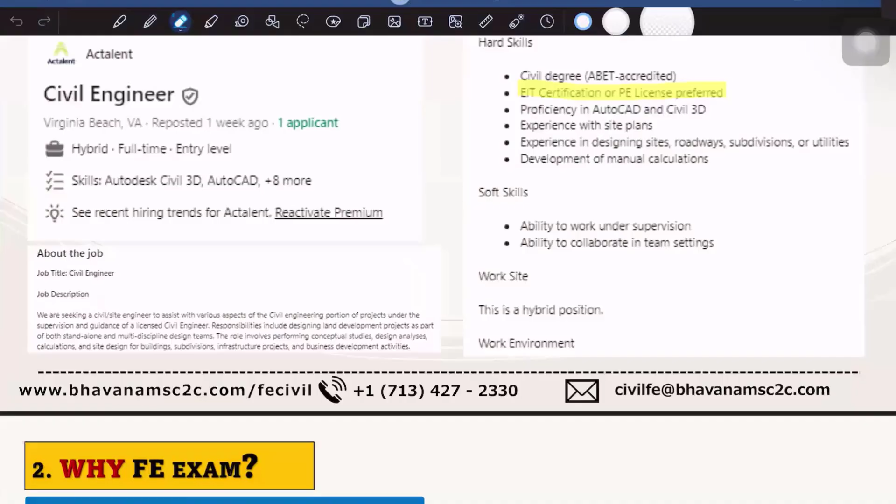Yeah, so we have this. So you guys tell me, is this FE exam open book test? Saida, you're responding, that's great, some of you did not attend the exam. I hope you guys know something about FE exam. Can you guys tell me what you know about it? Like, it's an open book, you can get the soft copy for the reference handbook. That's it, yes, and you can bring the calculator with you.

So it's an open book, and the open book is the soft copy, and you're allowed a calculator. Is it a scientific calculator or something else? Yes, scientific calculator, basically. And coming to the fact, it is an open book test. So is it 100% open book test, or does it vary with the exam and the date of schedule? No, the fact is it's not 100%. It's around 70 to 80% open book test.

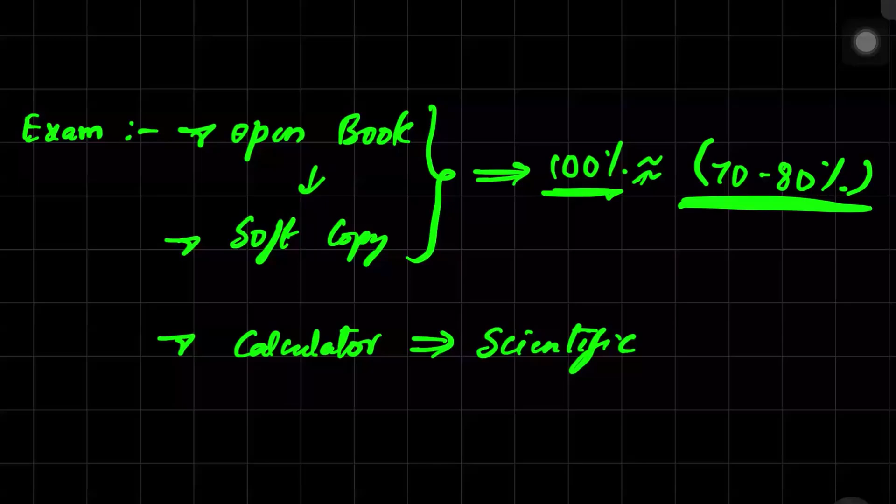There can be some questions, there were some questions which were out of the handbook, but they are from the syllabus. The handbook has officially mentioned what is there in the syllabus.

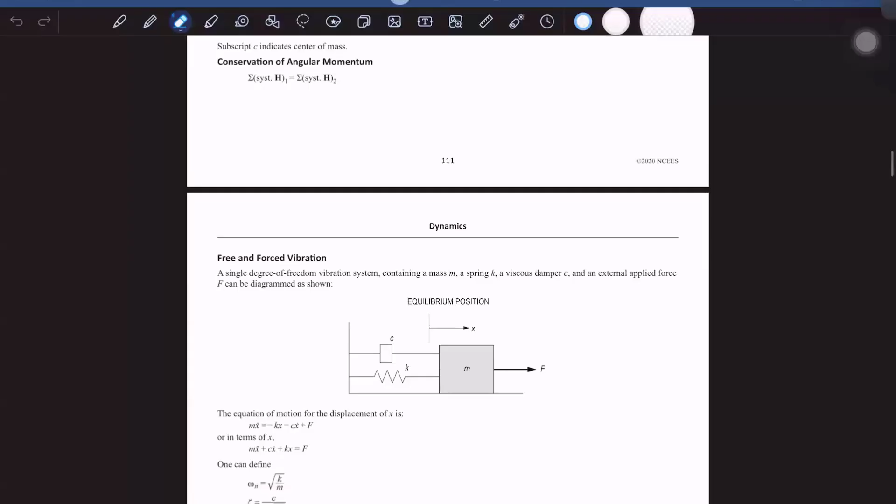So if you guys see, I just shared the syllabus right now. This is the syllabus that you can see from the handbook, section 10.5. I just extracted these pages out of it. For the civil case, there are plenty of subjects. How many subjects do we have? I guess 11. And 14? Yes, we have around 14 subjects. And total marks? 110, yeah perfect, so we have 110 marks for that.

And out of these 14 subjects, you can see all 14 are mentioned here, like geotechnical engineering, transportation, structural engineering, water resources, and so on. So you can go through them.

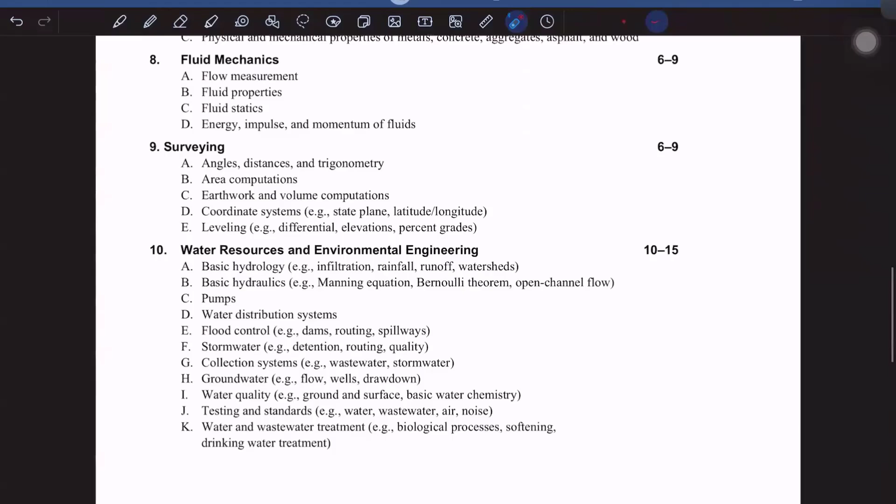And the fact is that there are subjects in the handbook. Like you can see the fluid mechanics, I'll show you an example of how fluid mechanics works. Here it is, the syllabus for fluid mechanics for civil engineers: flow measurement, fluid properties, fluid statics, energy, impulse, and momentum. These are the basic things that must be known for civil engineers, and that's why the syllabus is very limited for the case of civil engineering.

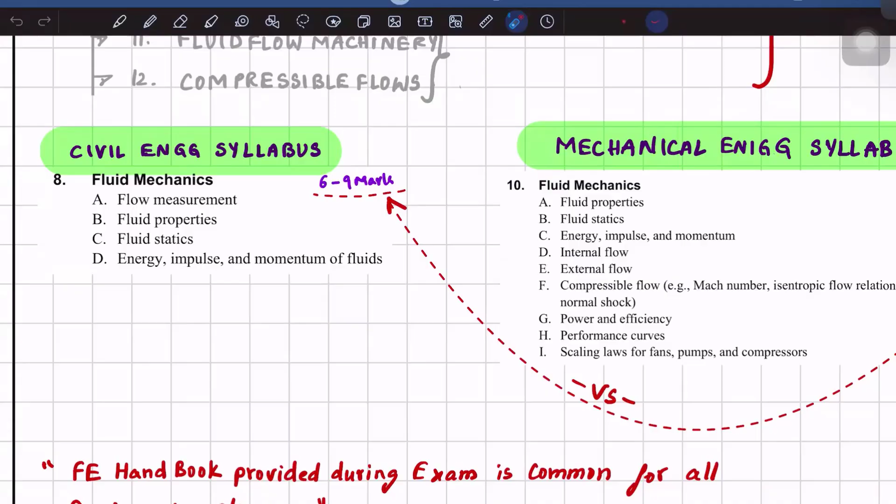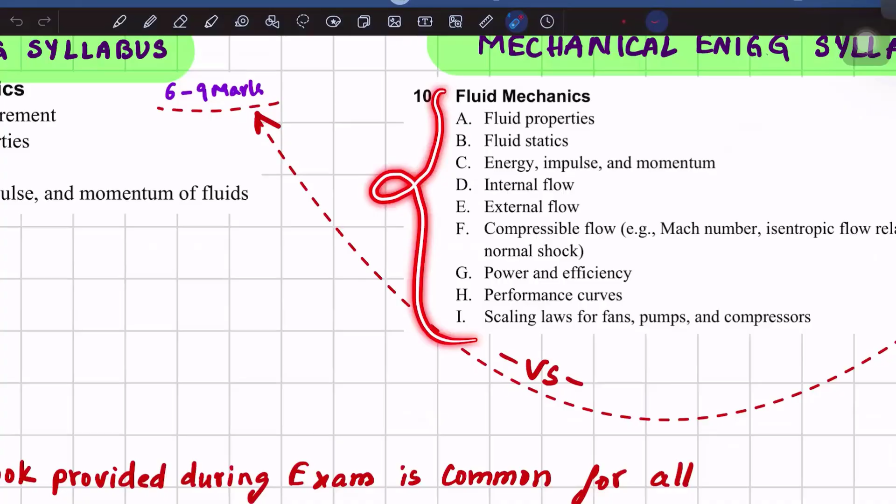And when you see mechanical engineering in the same handbook, the syllabus is a bit vast. So can you guys answer my question, just a doubt: is the handbook that is open to you the same for all streams like civil, chemical, mechanical, or will it be different? Same, it's the same, no. The PDF that will be open will be the same for all streams. Yes, it will be the same.

It is the same, and when you open the fluid mechanics handbook, suppose this is the PDF which you see during the exam, and when you go for the handbook there, sorry, fluid mechanics.

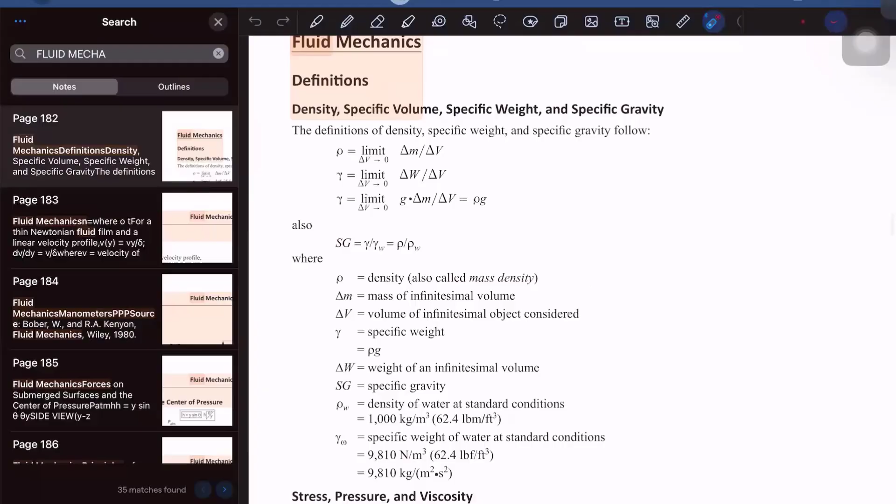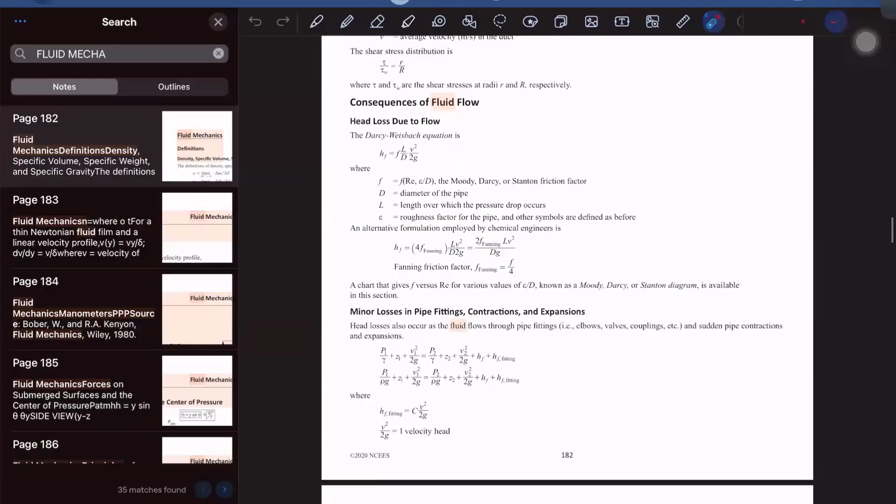So we can key these, we call them keywords, which means to go to a particular topic very easily, you can just search the topic and you will get there. So in fluid mechanics, there are plenty of things like manometer, barometer, fluid pressure, and then going further, Reynolds number, fluid flow characterization, and types of flows like turbulent, laminar, transitional flows, etc.

Out of all the pages available for fluid mechanics, suppose there are 25 pages. These 25 pages are meant for all the streams together, not exclusively for civil engineering. So we need not blindly just follow the entire handbook. We must go with a priority basis.

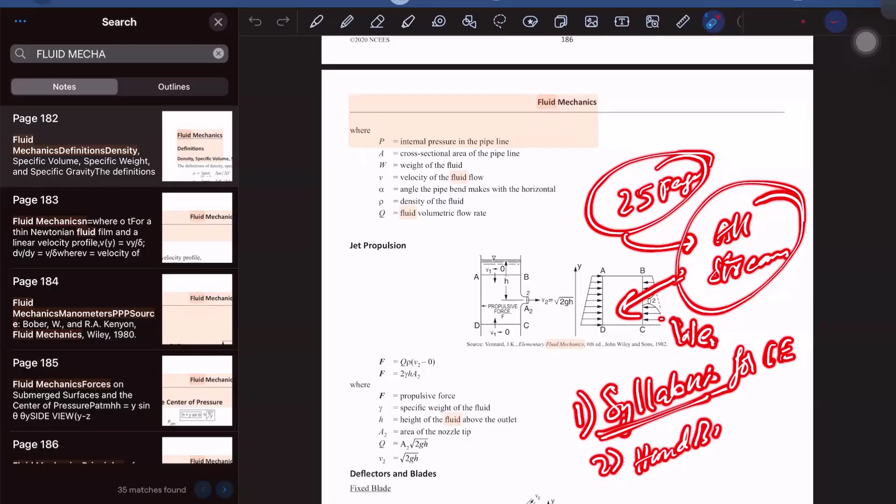The first priority is the syllabus. You first see what is the syllabus exclusively for civil engineers, and then go for the handbook. So if you see our notes, these are our efforts, we have split the syllabus like this, whatever content is there.

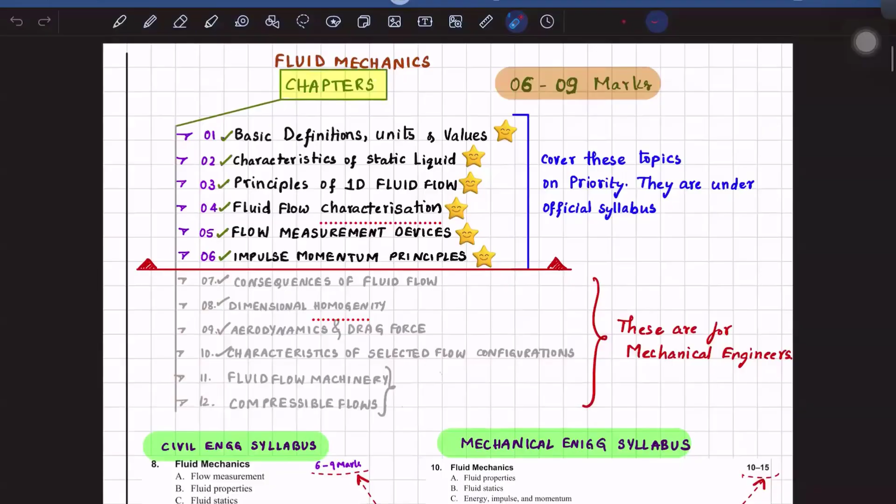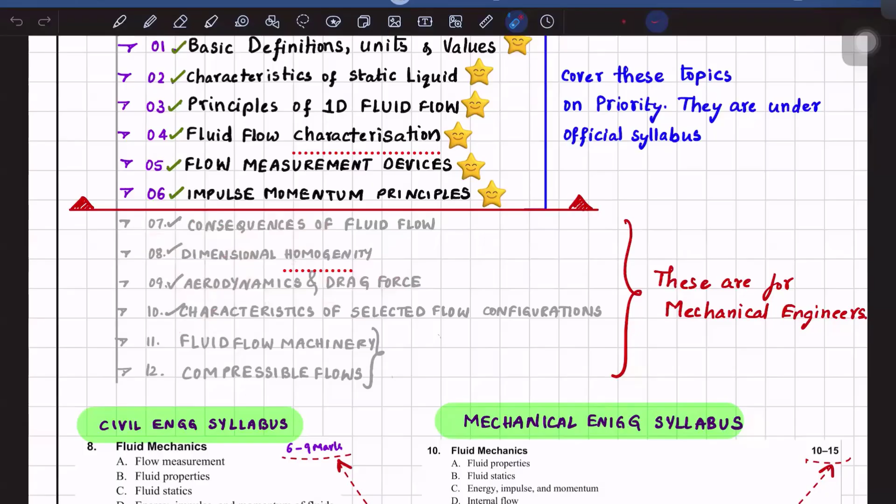In the handbook, there are around 12 topics for fluid mechanics. Out of that, we have separated the topics needed only for civil engineering, and nullified the topics for mechanical engineers. So doesn't this help you easily wipe out things in the handbook, reducing its length so your brain feels easier to prepare and recall the subjects?

And yes, everything is there. I have explained whatever I said, that the FE handbook provided during the exam is common for all. Fluid mechanics in the handbook is for both civil and mechanical. We civil engineers only need limited topics, and even in the standard books they have limited topics.

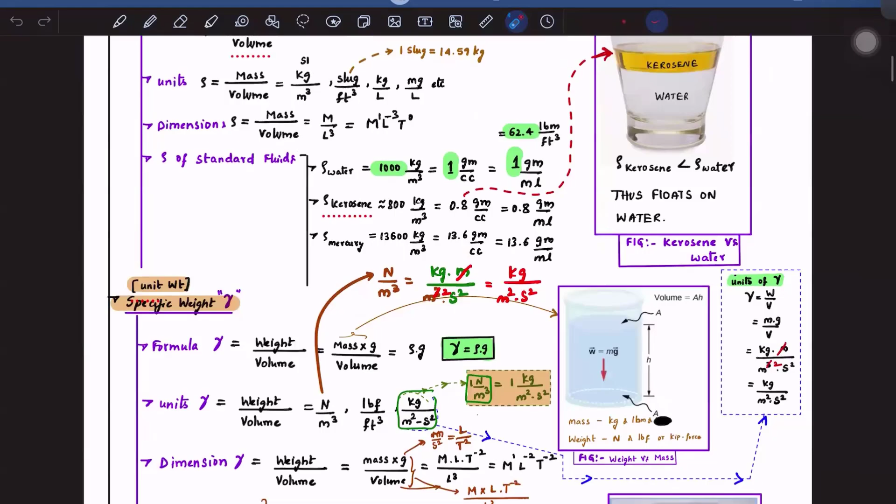So this kind of suggestion, and if you see our notes, we have done a lot of work for units conversion, as Madam Saida asked. There are plenty of examples here, and you can see some memory tips, danger tips, where we can make mistakes at the time of exam.

If you get a question related to units, there can be options like acceleration due to gravity - they can give meter per second square, and another option meter square per second. So we may get confused in a hurry, or with overconfidence put the wrong unit for acceleration, since there are two things in the entire syllabus which look alike.

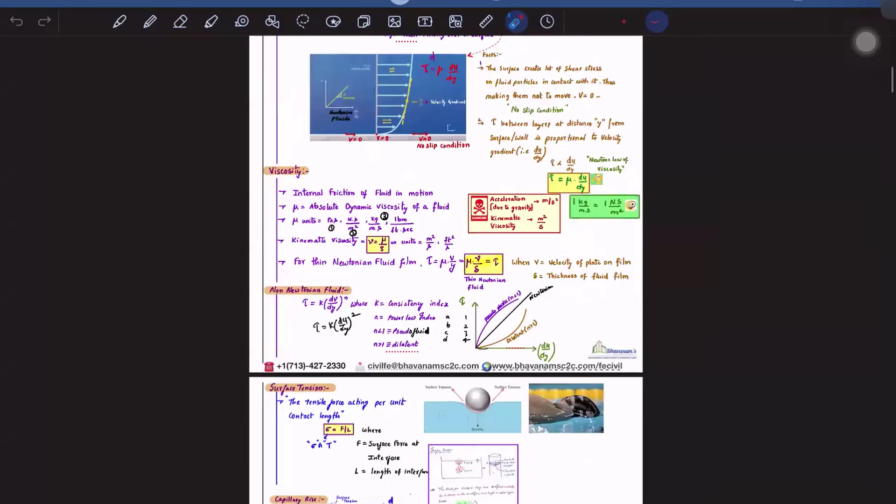So we have piled up all these things. You can see the efforts we have done - not only regarding the marks to obtain in the FE exam, we have correlated the content with actual applications.

Suppose this is an example for capillarity - why water is transferred from the roots to the leaves without use of any electricity or pump. This is all because of capillarity. You can see why a towel gets wet, water comes up, or the kerosene lamp, etc.

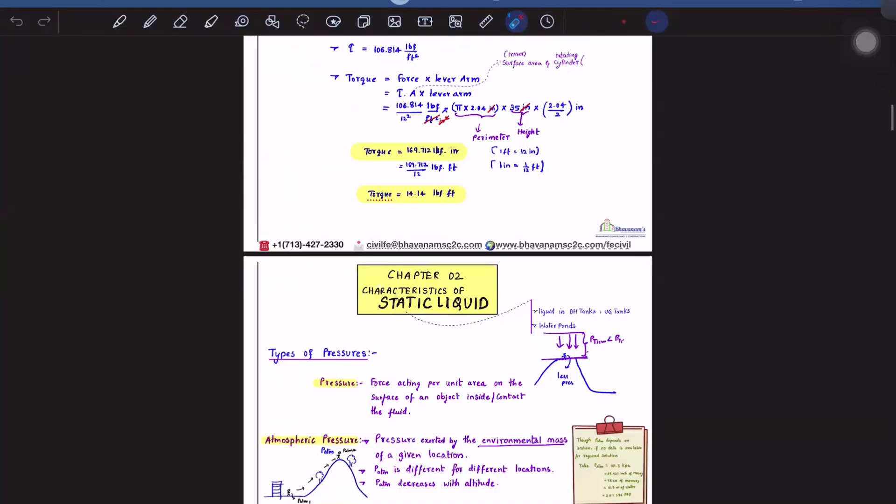So you need not worry about the content we teach, and we can proudly say we are doing the best among all the top institutes available in the market.

You can see, always recall the expected range of answers. We can get an answer conventionally for any subject. There are two ways of getting the answer - the first way is conventional. Go straight to the formula in the handbook, or go back to memory and pick up the formula, feed the data, and you'll get the answer.

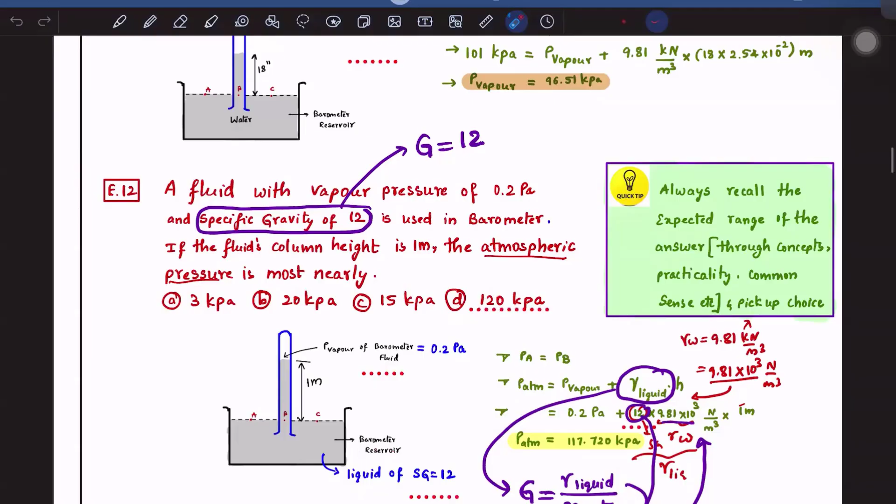The second thing, which is the most followed in competitive exams, is eliminating the options. To eliminate options, we have many tips - choose the sign, whether it is minus or plus, or choose a range of answer, whether my answer lies between 3 to 4 or 300 to 400. There are some possible ways to pick the practical range of answers.

And the third way is through possible units. If they ask specific gravity, specific gravity doesn't have any units, so you can pick the option which has no units. Such quick ways of answering questions will guide you in that way too.

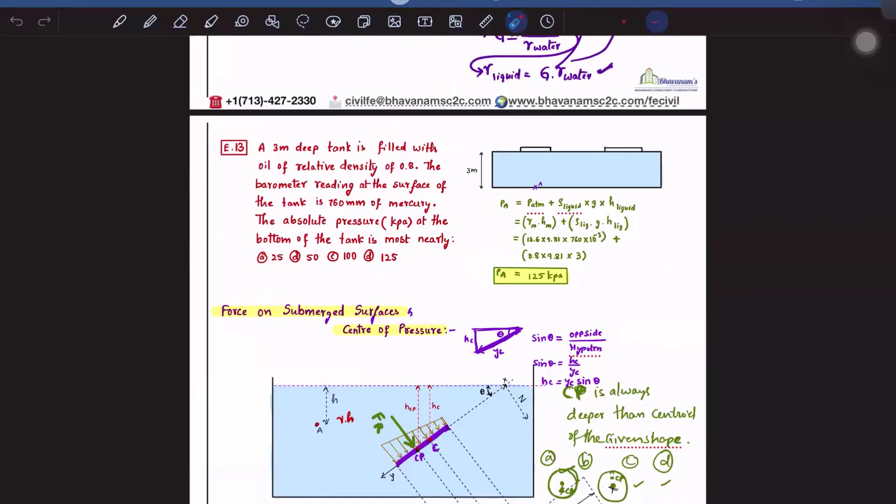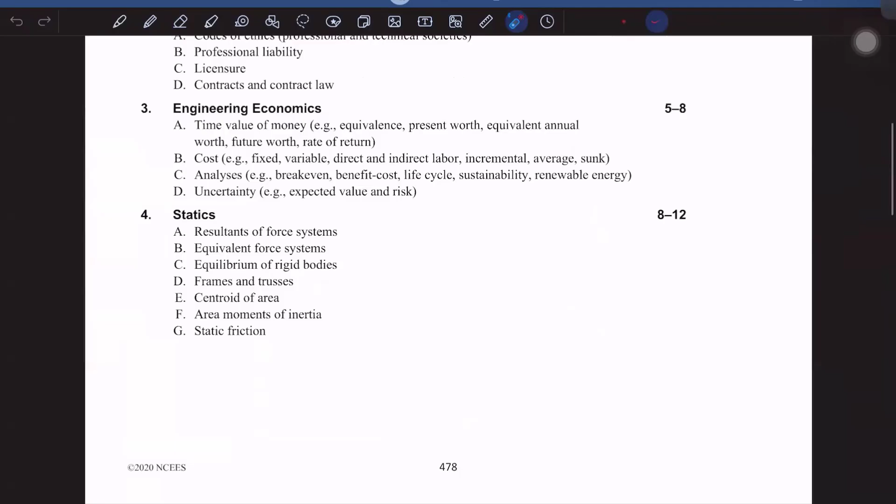So that's the thing. Coming back to the syllabus, I'm recalling for batch 6 guys the subjects I will be taking - number 1 is statics, then dynamics, materials, mechanics of materials, then structural engineering, and then I'll go for fluid mechanics. So where is fluid mechanics here?

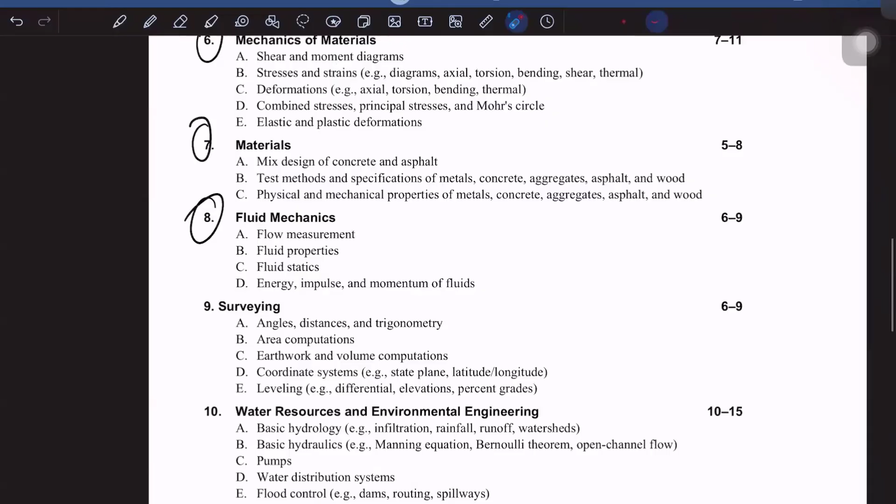Yep, here. So for batch 6, that is the new batch, I'm about to start the subject materials, which will help you get into the civil engineering field, if you are away from the theoretical knowledge, whether you might be working in some other field or even in the civil engineering field.

So I'll start the subject with materials, which will be a good transition for you to catch up on other subjects. Coming to materials, this carries about 5 to 8 marks of weightage, so out of this you can expect on average 6 marks.

So coming to the 6 marks, we have the mix design of concrete and asphalt, and the test methods and specifications of metals, concrete, aggregates, asphalt, and wood. They have basically emphasized these five areas. So this is all about the syllabus.

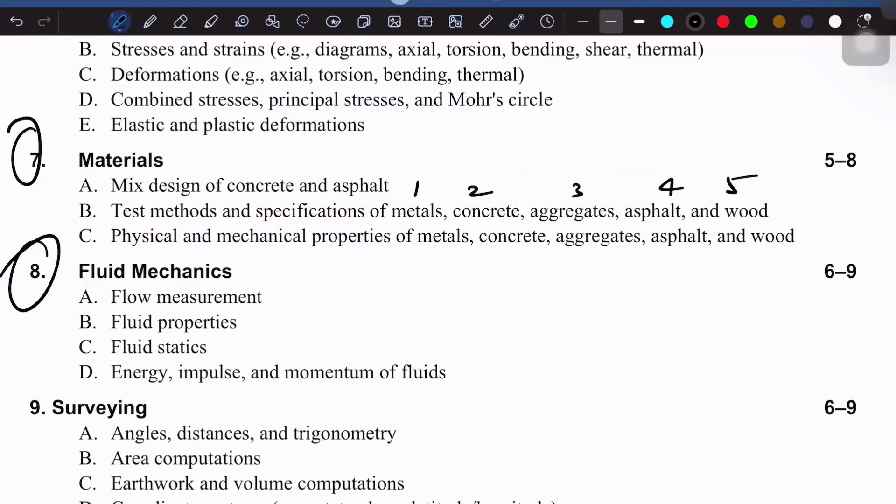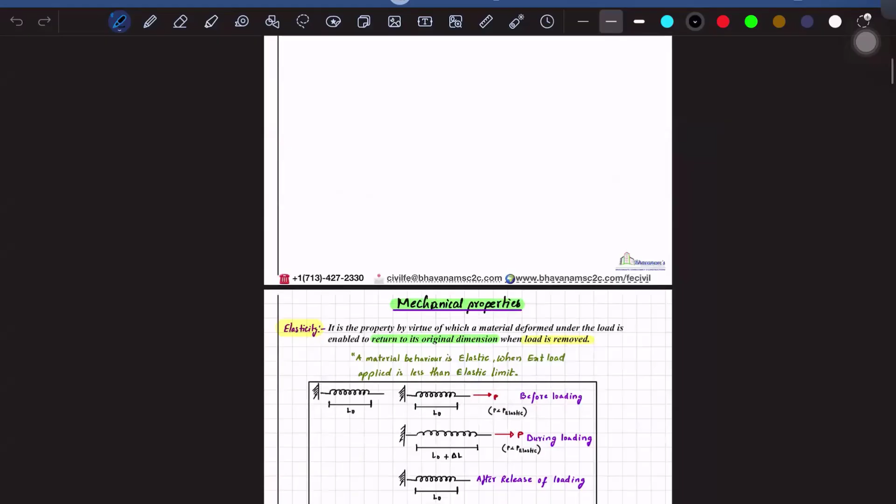Now coming to this topic of materials, tell me, what are the different materials you see in day-to-day life in civil engineering? Name them. Asphalt, concrete, wood, cement, steel, soil, aggregate, timber.

Yes please, what do you say? Admixtures. Perfect, admixtures. And soil, is it soil or do you mean something else? A kind of soil. What soil is it? Someone said a pretty good thing, admixtures, and someone said soil.

Glass is also a construction material. And stone, aluminium. UPVCs, perfect, there are UPVC windows. And sanitaries, sanitary wares, they are not exactly construction material, they are made of something else. PVC? Sanitary ware may be made of some China clay. There are different materials used.

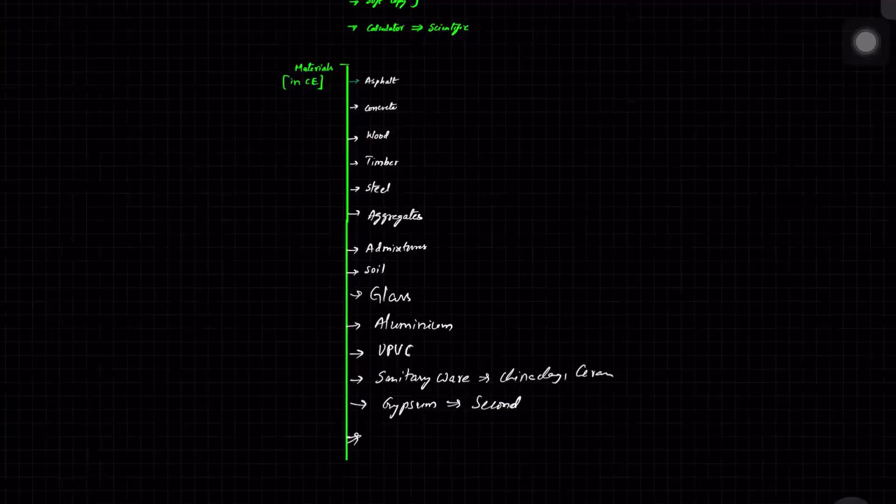Ceramics, gypsum, yes gypsum is also a construction material. Actually gypsum is a secondary material offered to cover the joints between primary materials like aluminum panels, and so on. We can even do gypsum false ceiling. Yeah, gypsum is a material, yes. Like this, bricks, perfect, that's a pretty basic answer we are expecting.

Drywalls, cardboards, stone, yeah stones, very good, stones are also construction materials. May not be known to them. So where were stones used in your day-to-day life? In the form of aggregates. Yeah, stones can be converted to aggregates. I agree, this is right.

So asphalt, yeah, stones after converting into aggregates are used in asphalt. That's fine, but can't we use stones directly as it is? You can use the stones in earth soil fill for soil support. So which indirectly you are saying, stones used for embankments. Embankments, yes, you're almost near. So which we call them as random rubble masonry.

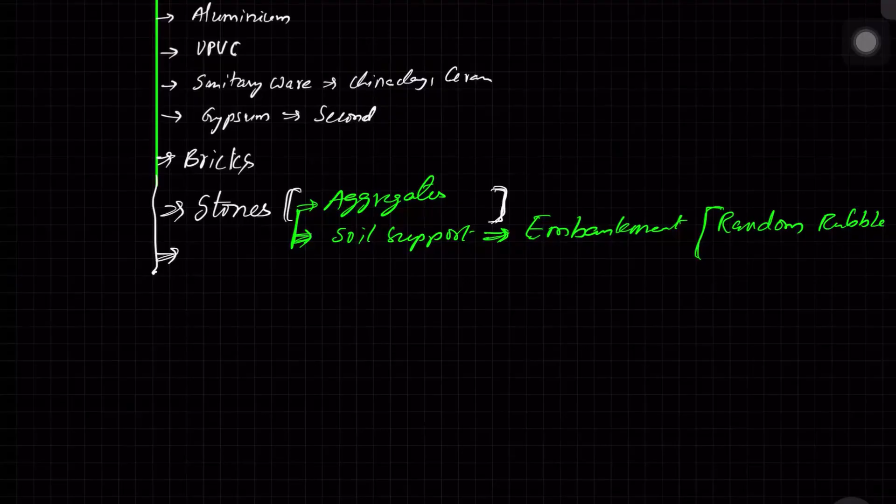The rubbles are nothing but stone. If you do some masonry work with stone, we call them random rubble masonry. It serves different purposes: they can be used as boundary walls for separation, or for retaining the soil as a supporting structure, etc. Did we miss any other important material? Just think of it: asphalt, concrete, wood, timber, steel, and so on.

So coming to the most important thing, what is asphalt? Where do we use asphalt? Roads, yes, they are used in roads. Coming to concrete, it's used almost everywhere, right? Yes, it is used for buildings, for any kind of RCC works, PCC works.

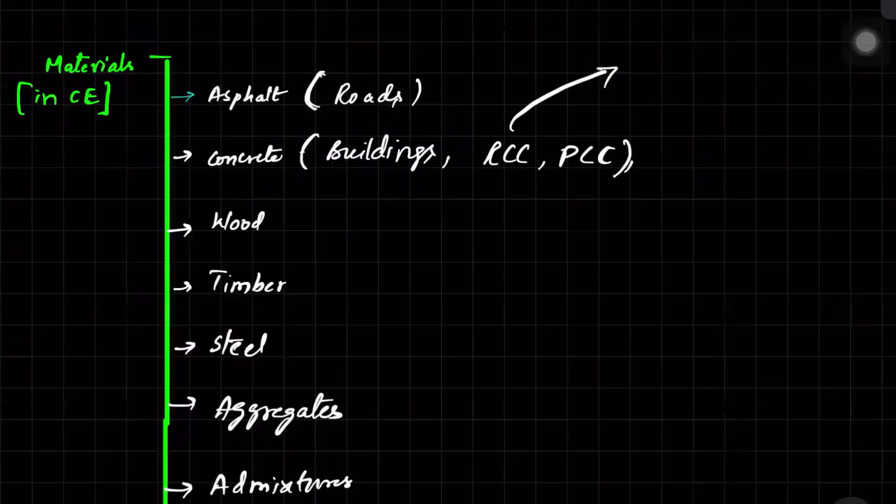What is RCC? Reinforced cement concrete. Okay good, and what is PCC? Precast, Portland, precast cement concrete. Plain cement concrete, yes. Someone said precast, yeah that is also a kind of concrete we use with the help of steel under compression.

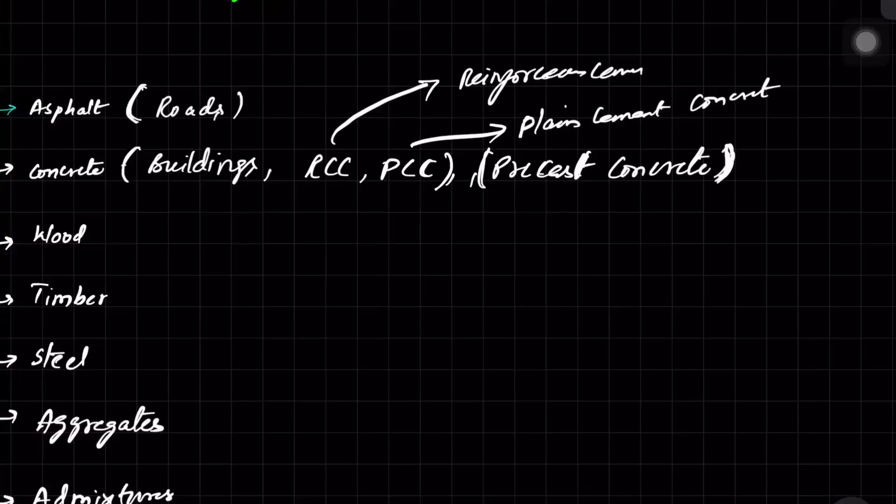Am I right? In precast concrete, this session is a general session, I will try to just recall all the things which we know till now. So what do we do, why do we do precasting in concrete? While construction of bridges, it improves the strength of the cement. Improves the strength, that's the main purpose. Pretty good. So how does precast improve the strength?

By applying pressure. Yeah, by applying pressure, pretty right answer. So the madam said right. So we know there are some beams, simply supported beams or any kind of beams, when we apply some load, and you guys know we'll use the tension bar here.

Am I right? Should I use tension at the top or bottom? In the bottom, for RCC. Yeah, so anyone else, is it right? In a simply supported beam, when the load is applied, one of our friends said the tensile bar must be at the bottom. Why should it be at the bottom?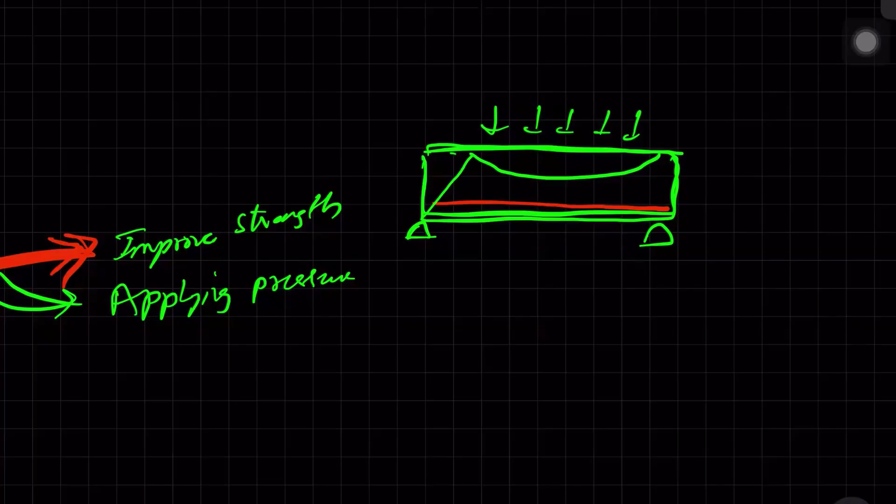Because it expands down and almost compresses near the top. Yes, perfect, you are right. So when we apply some load, the deformation shape will be kind of like this, something like this.

We call this profile as sagging. Because of that, the top fibers will be under compression, and because of bending, this member has elongated to some extent, so this will be under tension. Because of that, we have given steel.

Why? Because the concrete has some weakness. What is that weakness of concrete? Weak in tension. Yes, perfect. Concrete is weak in tension.

That's why in RCC we take the help of our friend, the reinforcement steel. So we place him where we want him. We want him at the location where we have the weakness. We have the weakness at the tension side. That's why we placed the reinforcement steel at the bottom.

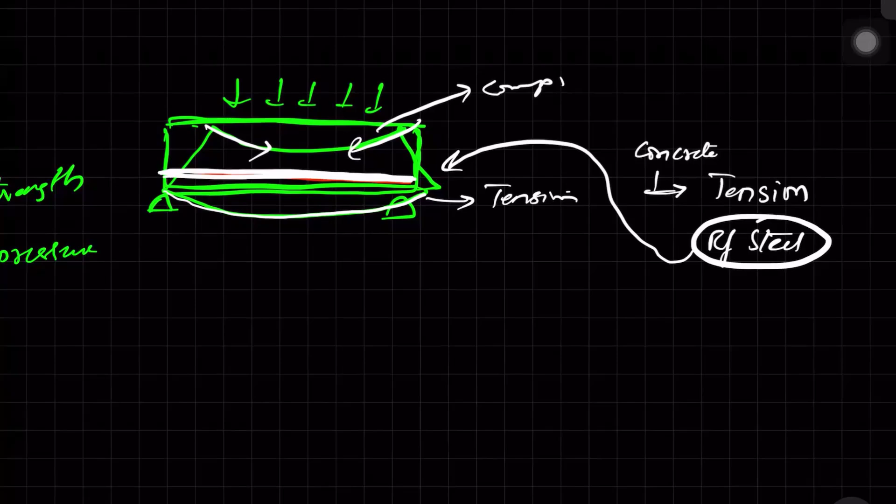Now if the loads increase further and further, even our friend reinforcement steel can't help to take the load. Then what we do is give some strength to the reinforcement, like Iron Man wearing his suit, to give some extra support to this guy.

So what we do is try to pull this guy now. Since steel has some elasticity, we'll try to pull him, assume the steel as a kind of rubber, pull him and tie him at the ends. Now this rubber band, or the steel to some extent acting as a rubber band, will try to regain its position.

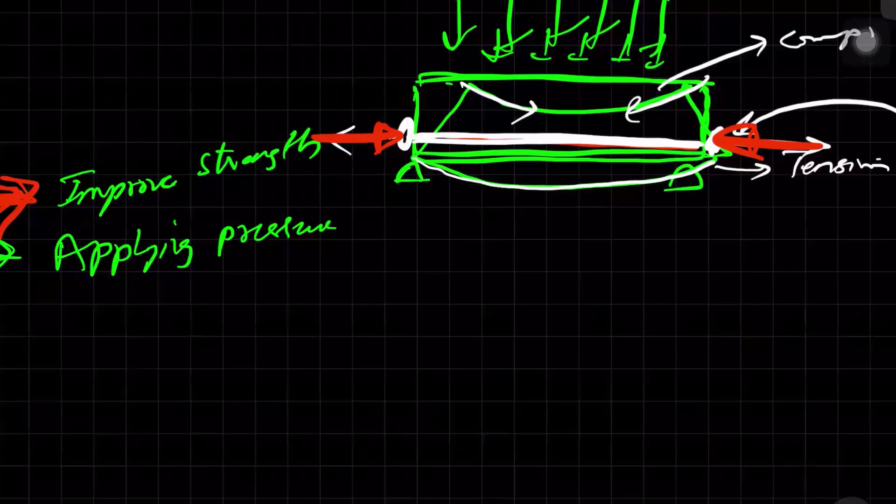With that effect, it will try to compress this here. So when you try to compress, the tension will be nullified with some compressive force, which is developed due to the elasticity of the steel. So this is all about precast. I just recalled it, and yeah, someone said cement also, right?

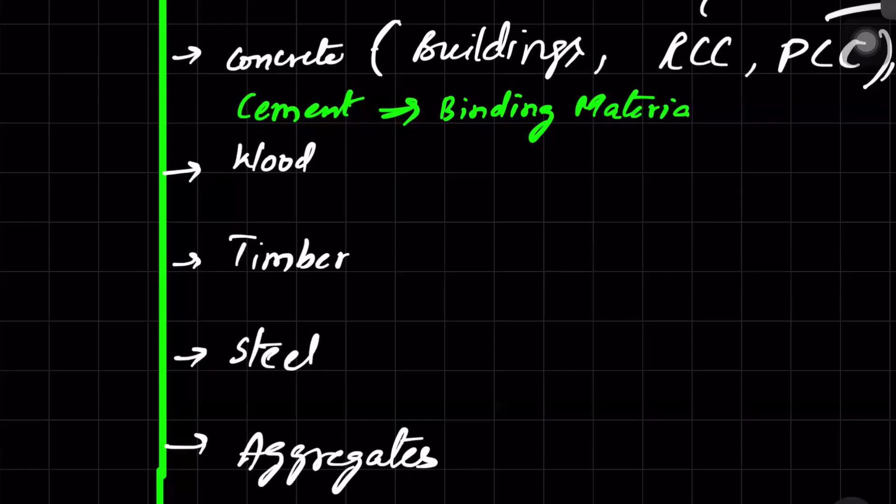So what is cement and how is it different from concrete? Cement is a binding material in the concrete. Wow, that's a pretty right answer. Perfect answer. Cement is the binding material used in concrete.

So is it only used in concrete as a binding material? We use cement in some other places. Can you guess? Mortars. Perfect. Mortar. Other than the madam who answered right now.

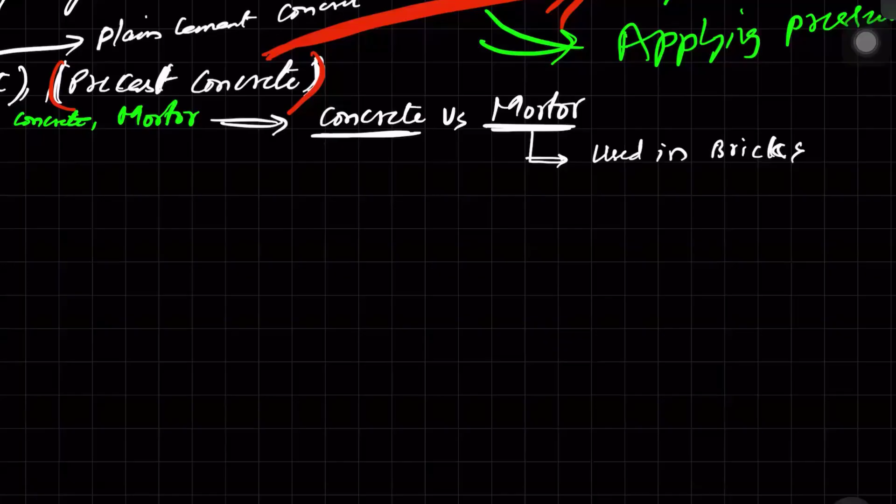So what is the difference between concrete and mortar? You guys might have heard it in day-to-day life. Mortar is more like a binding agent between the concrete or the bricks, for holding the structures together. The answer is right. Mortar is used in bricks as a jointing material between layers of bricks. But we cannot use concrete in bricks.

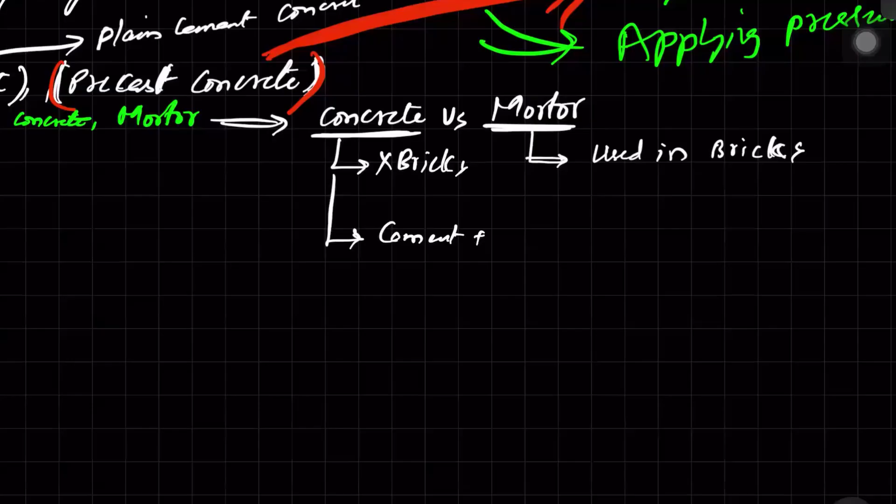So you can see concrete is made of cement plus aggregates, sand, water, and sometimes admixtures. Madam said sand, but I did not consider writing it here separately, because that is already included in aggregate.

Aggregates are again of two types, can you guys name it? Basically two types, fine and coarse aggregate. So out of this, one is called sand. Which one is sand? Fine aggregate. Fine aggregate is sand. Pretty good, you guys are pretty good with the basics.

Then it is easy for us to crack FE. This level of basics is more than enough actually. Now, one of you guys said the construction material as soil. What is the sand versus soil? What are the differences?

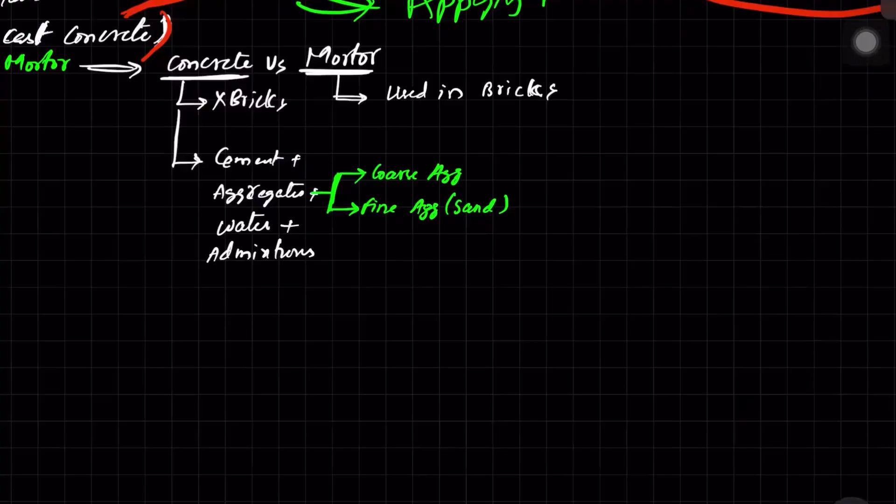Cohesion, sand property. Yeah, what is it? What did you say? Cohesion property. Okay. I can also say sand can be considered as a fine material when compared to... Yes, so you are right. There is some technical term for this.

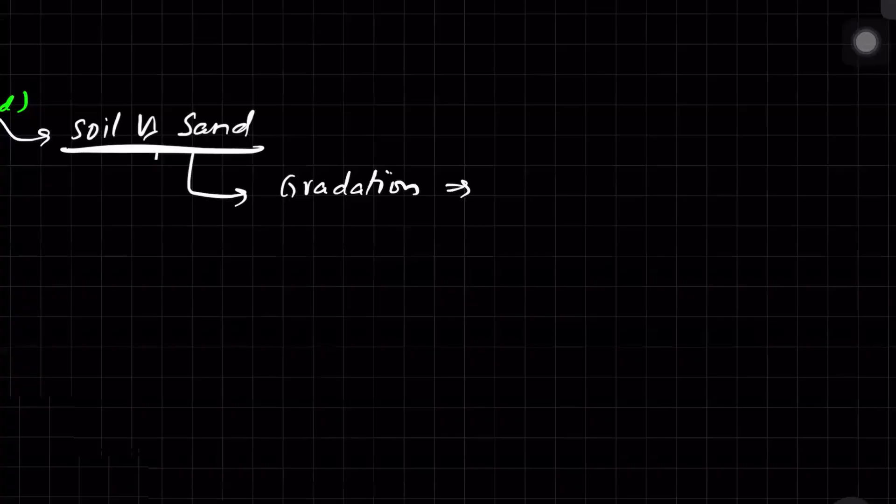The sand has some defined range of aggregates, we call this as having some definite gradation. If you study geotechnical engineering, there is some gradation like 2 microns to 75 microns, we call them fine aggregates, and so on. So if a particular soil is graded from a defined size to size.

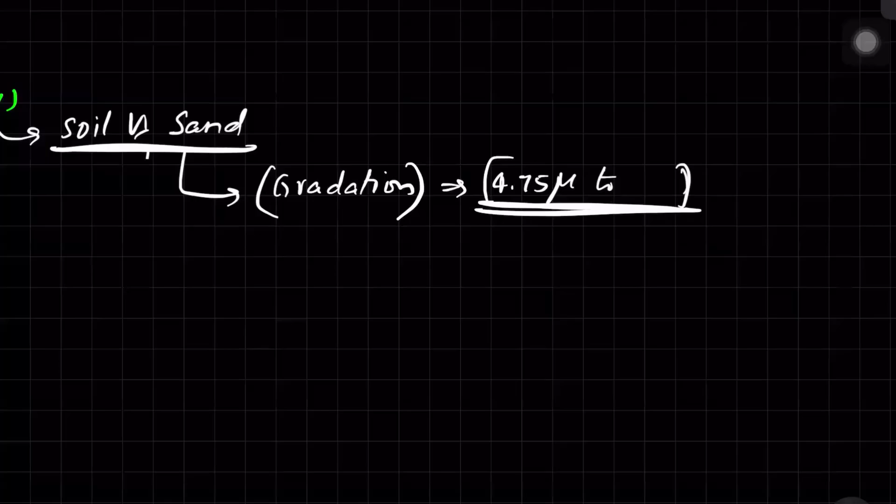4.75. Yeah, 4.75. Even I myself did not recall it because I'm not teaching those subjects, but you are right, it involves the numerical 4.75. And the soil is just a raw thing, whatever naturally you find on the earth during construction while the foundation, you may get different types of soils.

Whatever is available in the raw form, according to the SBC. According to the SBC, yes, you mean saying safe bearing capacity, right? Soil bearing capacity, I think.

SBC is safe bearing capacity. You can recheck it, I will also recheck it. I think the classification is based on soil, unified soil classification. Yeah, you are right.

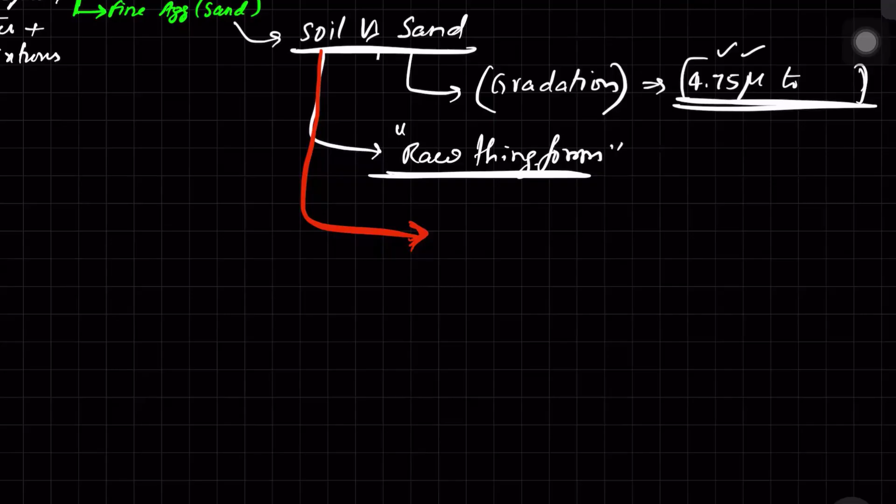You will learn or recall this during the geotechnical class. The soil is again of two types. Do you guys remember? There can be clay soils, silty soil, sand, gravel. These are types of classifications that come regarding the size. Some has more cohesiveness, some has less cohesion, etc.

Even in the materials, we have to know something about aggregates, especially aggregate impact value, aggregate crushing value, and something called fineness of aggregates, etc. Water absorption percentage also. These are the different things we must learn about aggregates.

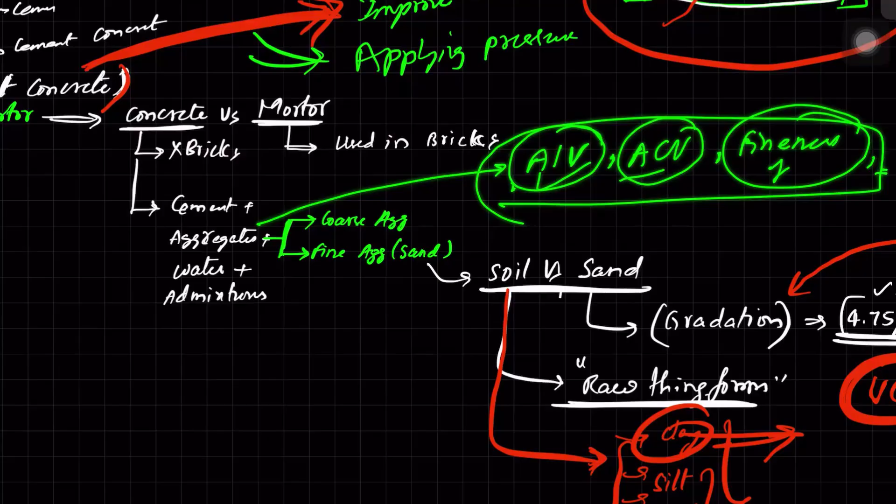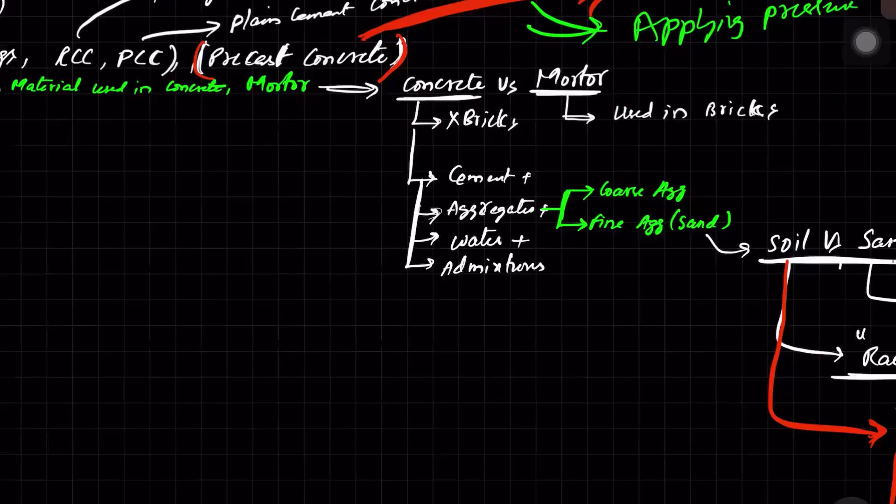Coming to water and admixtures, one of the students said admixtures. So why do we use admixtures in concrete? To strengthen the concrete - that's the right answer. Another reason is bonding agent, to improve workability. Not only that, but one of the reasons is also to improve durability.

We can use admixtures to improve durability and anything else? To save cost, economic, to control and decrease the setting time of concrete. To control the setting time of concrete from transportation from batching plants to the sites.

Wow, that's a pretty practical answer. It is being done at sites to control the setting time, to maintain the concrete so that it won't set before it reaches the site. To control the setting time, we use different admixtures.

Even if you're from US states, you guys know in winters we need concrete that is favorable for that condition, which will reduce the freezing and thawing effect. This is related to winter climates. Can someone say what is this freezing and thawing that happens in concrete or even in roads?

Freezing of water within the soil or rivers - yeah, perfect, I really appreciate the answers in this batch. When you cast the concrete, there are coarse aggregates, cement, and small aggregates. There are possibilities of spaces between the aggregates, pores, we call them pores.

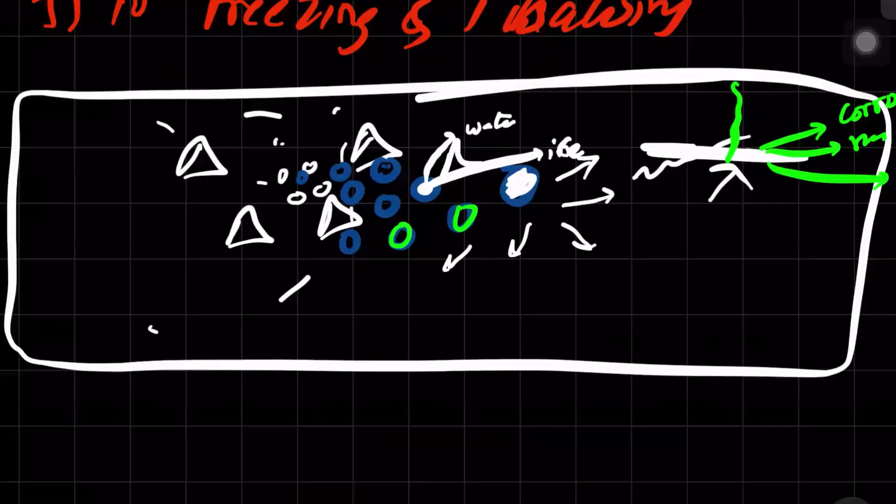So to avoid that freezing and thawing, we purposefully create some bubbles in the concrete. To do so, we have some admixtures related to aluminum powder and so on. This is all about the different admixtures we have talked about.

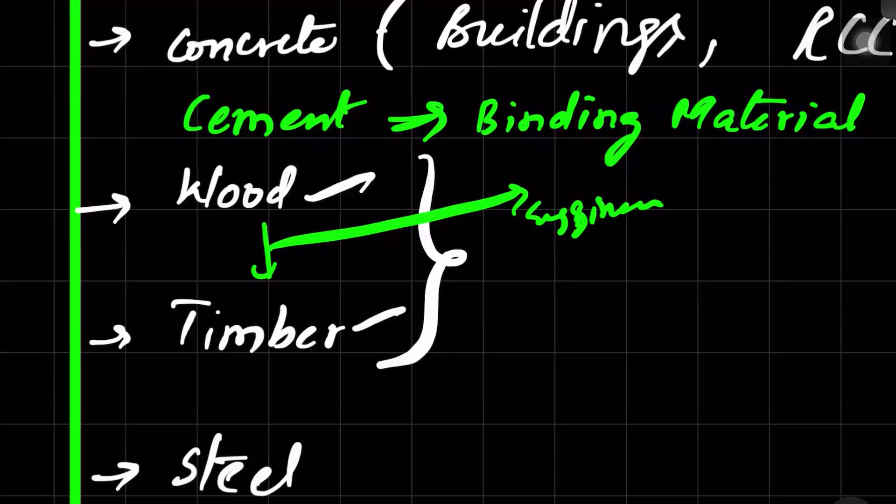Then some of you mentioned wood and others mentioned timber. What is the difference between these two? Wood is the raw form. So actually, the raw wood that is used for engineering purposes, we call it timber. After treating it, there are many treating processes, seasoning it.

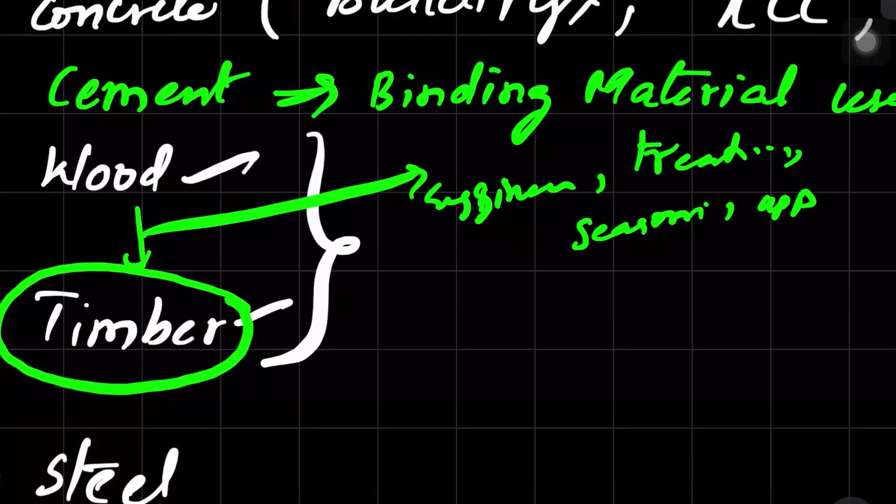There are some sequences after applying preventive agents like anti-termite agents, and so on. After that, whatever material you get ready for use especially in constructions, we call it timber.

Coming to steel, what are the different types of steel you have seen? Do you know different types of steel? Like you might have seen, definitely - TMT bars, HYSD bars.

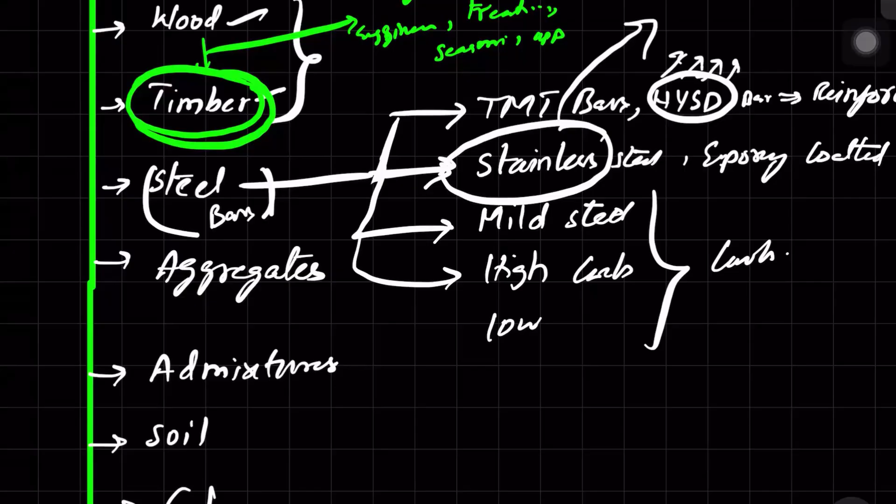What are those steels? Stainless. Yes, there are stainless steels and mild steel, epoxy coated steels, and high carbon steels. There are different types of steel based on composition. If the composition is more, it will be one kind of steel - there's variation between high carbon steel, mild steel, and low carbon steel based on carbon composition. To make steel stainless, what do we add? Zinc? Yeah, and there are other steels like galvanized steel to avoid corrosion, and even galvalume steel, which is an upper version - zinc plus aluminum combination to give much more resistance to corrosion.

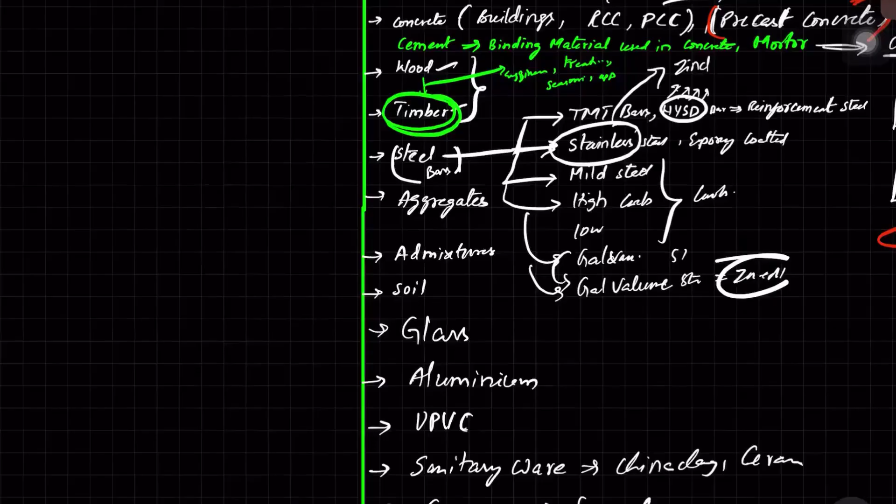That's the thing about steel, you will go deeper into the subject and study the properties of steel. What are the different properties of steel? You can guess, tell me. Every material, even concrete, steel, or brick, has some definite properties.

Physical properties, yes. And there are properties called mechanical properties, and again properties like chemical properties. Basically these are the three different properties we have. Now the basic question - you can guess what my question is. What is the difference between physical and mechanical properties of any material, irrespective of steel or so? You guys might have heard these words even in 11th and 12th, you may remember but might have forgotten.

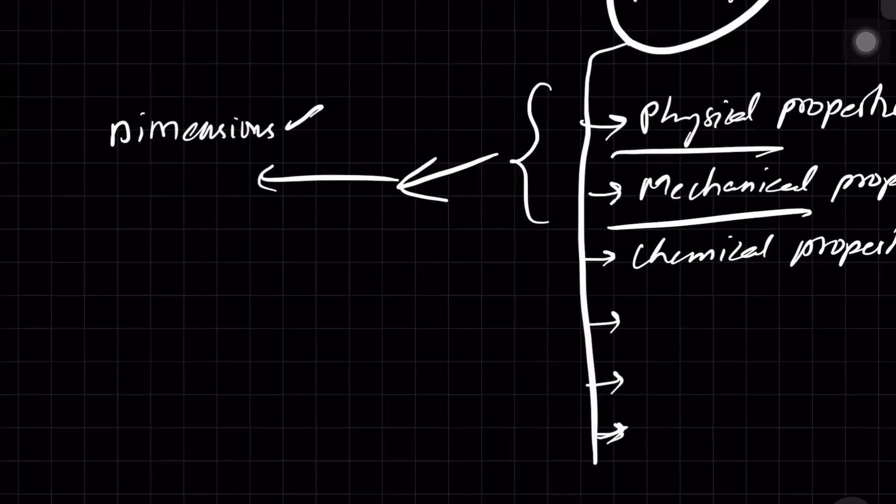Physical means dimensions, maybe. Resistance to corrosion - that is a chemical property. Okay, I agree with that. Your answer is right, but it's not the complete right answer, it adds up to the answer. Behavior is a mechanical property.

Mechanical property is behavior - you are 50% right. And the way it works is performance. Performance, yes, perfect, that's also a mechanical property. Strength, and strength - now I agree, this is a much better answer. Then durability. Is durability mechanical or chemical? Does it depend on the material used for long durability, or does it depend on the shape?

I think it's chemical, sorry. Okay, is durability a mechanical property? So durability - now I have the question to myself, is it mechanical or chemical? So we'll check it. If you're working on a laptop or have mobile aside, you can use ChatGPT directly and type the prompt.

Is the durability of a material a physical, mechanical, or chemical property? It will give the answer, you can try right now. And is dimension only a physical property? Any other thing? Dimension is right, I agree. Can I say color? Shape? Is it shape? Again, it's related to dimension.

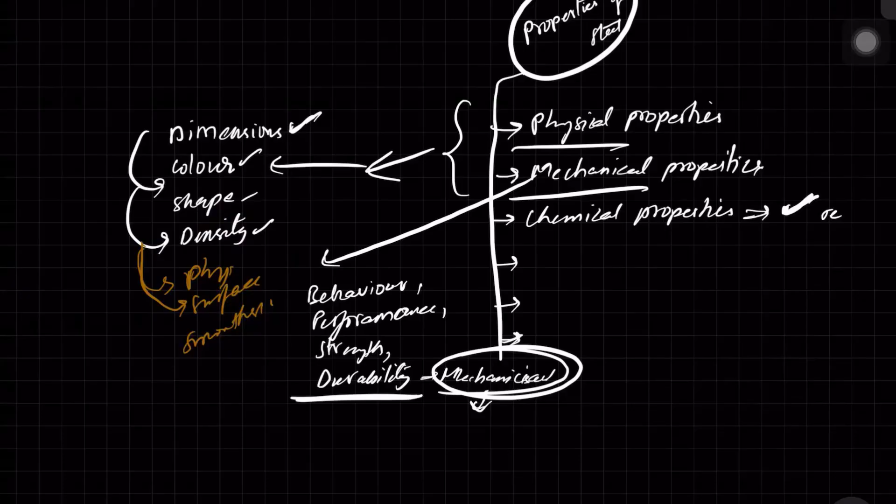So there are plenty of properties, like temperature of a body, you need not break it, right? Design, like the ribs they use on the top of the reinforcement, that will be a physical property. You mean the surface smoothness or roughness, they are also physical properties.

So when you go to the mechanical properties, you guys said it right. The strength, performance, behavior. We can also add elasticity. So behavior is elasticity, whether a material is elastic or not.

Okay, you are taking the rubber band with your hands, you are doing it. But if you take the steel, you have to take it to the lab, you have to connect it in the universal testing machine, apply some loads, and then only you can get the elastic behavior of the steel. You're trying to change its shape, right? Changing the shape or breaking it.

If you want to know the strength of the steel, again, you have to keep it in the UTM and apply the load till it breaks. Then it will give you the reading at which load your steel will break. Even if you take concrete, you'll place it in the compressive testing machine and apply the load. When it starts cracking, the dial gauge will stop and turn back. So the last location of the dial gauge will tell you what is the strength.

So the strength, as our friend said, elasticity, ductility, and brittleness etc. All these are the behavior or performance which need actual testing in the laboratory, or in general terms, you have to change the shape or break the material. Such properties are mechanical properties.

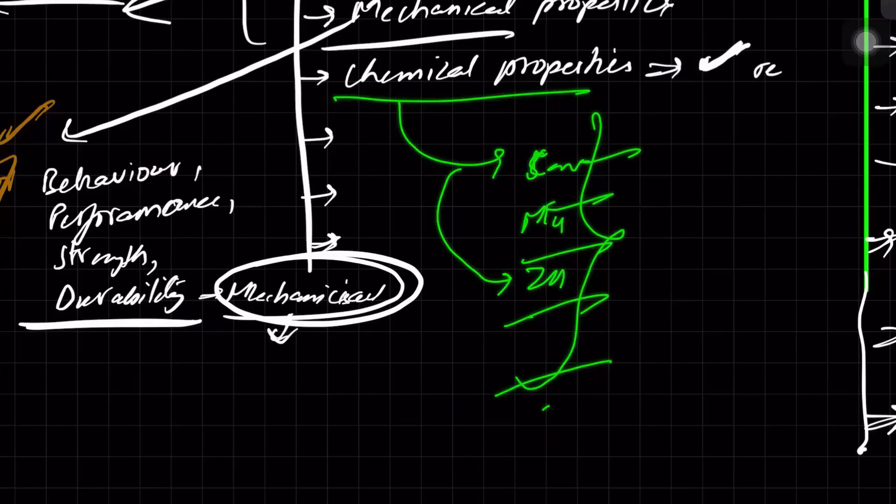And obviously the name says chemical properties, which means chemical composition - whether the steel has high carbon or high manganese or high amount of zinc. The compositions, if you talk about composition, that is chemical properties. So yes, these are the different properties we're going to study for concrete, steel, as well as asphalt.

And what else is there in the syllabus? Where is the syllabus paper? Concrete, asphalt, and then metals. There are different types of metals. Apart from steel, can you say some other metals?

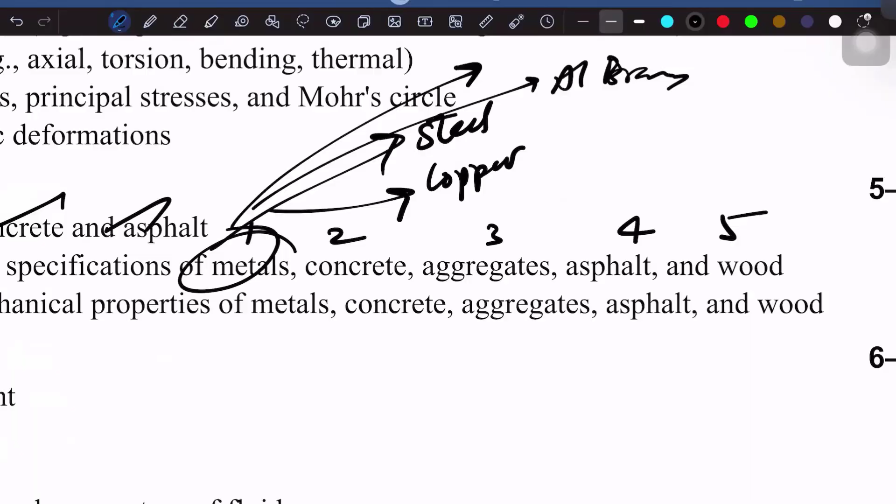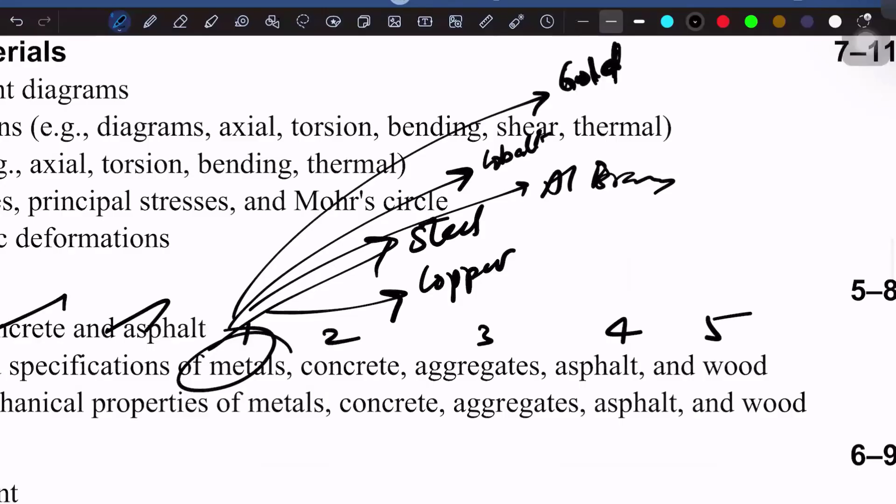Copper, yeah perfect. Copper, aluminum, brass, cobalt. Manganese? Are you sure? It's a guess, it's not a metal. Manganese is an integral part, like steel has manganese, so it's not a metal ultimately. Is gold a metal? Gold, yes. Zinc, silver, titanium, aluminum - they said aluminum is a metal, and silver, yes, bronze. Right, so these are different types of metals we're going to see.

There are different test methods, like I said, universal testing machine to measure the tensile strength. For compressive strength, there will be different methods. There will be like softening point test for the asphalt, and so on.

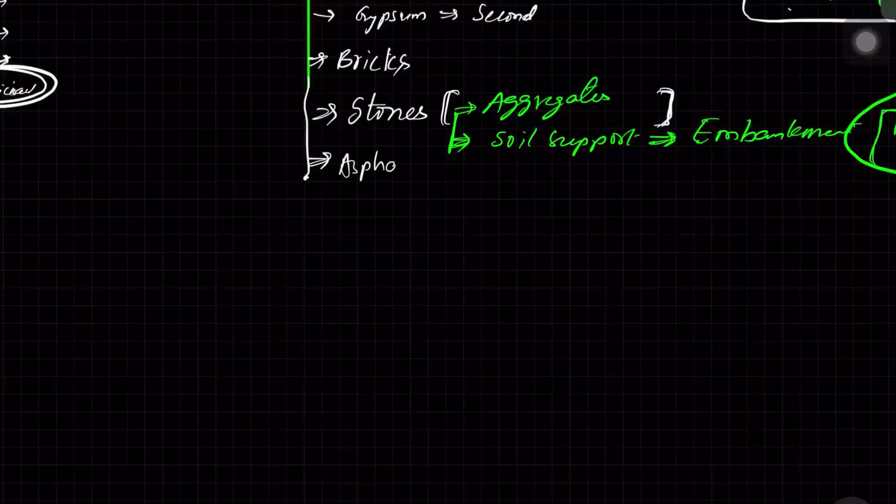So coming to this, what is asphalt? It's a mixture of bonding material. Now let's go to the material asphalt. Someone said it is a mixture - that's a pretty right answer. Then it is a mixture.

You know asphalt, to be very precise, we call it asphalt concrete. Why we call it asphalt concrete is it doesn't mean it's the same as our regular concrete. It is a mixture where, instead of cement, we use some other binding agent. What is that binding agent?

We use bituminous material - asphalt, or we call it bitumen, or we call it tar. To be frank, these things have different purposes with slight modifications in the compositions or the process by which they undergo distillation, etc. I will tell you clearly what's the major difference. But for the FE case, they use only the word asphalt interchangeably for bitumen also, or with tar also.

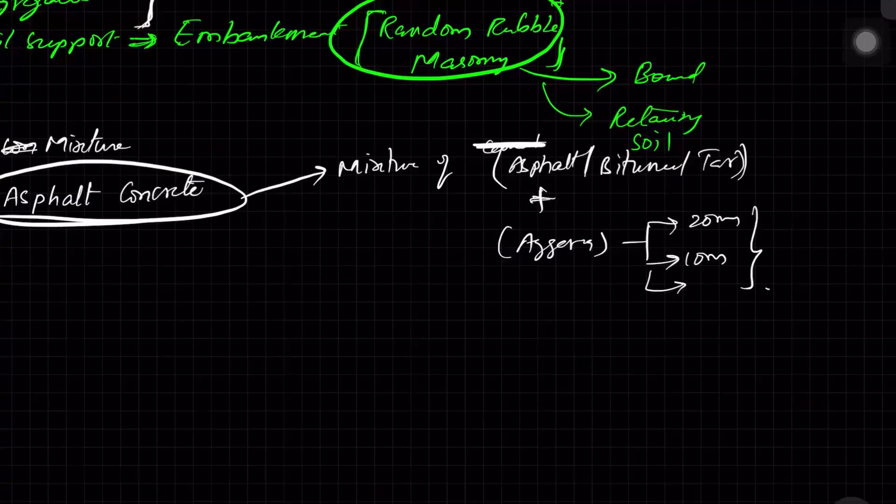So here is the case - there will be a mixture of asphalt, which you can see as the black thing that they heat and then apply on the road. We have the aggregates obviously, and the aggregates again have gradation. In this, remember, there is no fine aggregate like sand - they use aggregates of 20mm or 10mm. There are different gradations of aggregates they will take, right? And there will be pores inside the asphalt.

This is the combination of asphalt. We'll study in depth about them. And anything else we left?

We are not going to study about glass. To be frank, glass is not the actual construction material—there will be a structural member like an aluminum frame, UPVC frame, or even a wooden frame, and inside that frame we give the glass. Even frameless buildings have structural support like stainless steel hinges or stainless steel clamps holding it from behind. So these are not primary structural construction materials.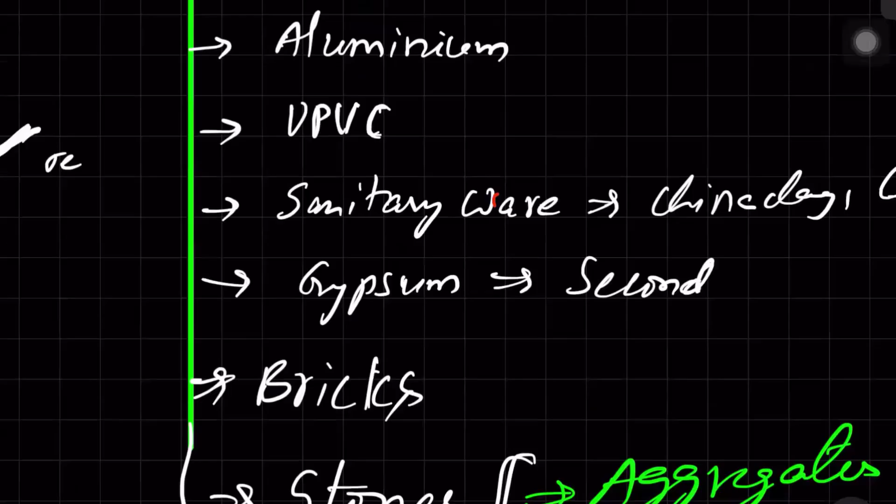Even if you see something like sanitary ware, we are not going to study about this. We're going to study only the things listed here, like metals, concrete, aggregates, and asphalts.

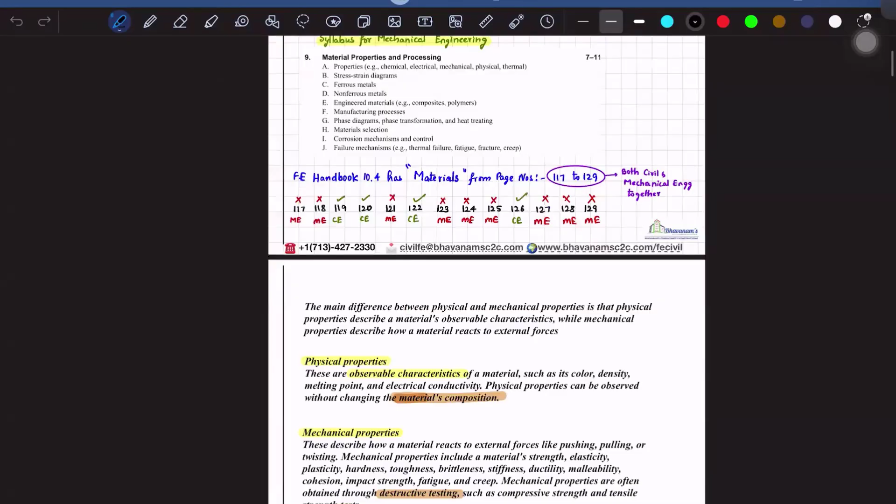Coming to the notes—yeah, here are the notes. I have started with properties of steel, like what is mechanical property. Here I have given the difference between physical and mechanical properties, and I have helped you guys with the FE handbook, where there are different pages.

The pages are the same even in the 10.5 version. So here these are the pages I have marked with a cross, so you need not refer to them. Only the things in green color are related to the handbook. Now when I go to the handbook within the pages I mentioned there...

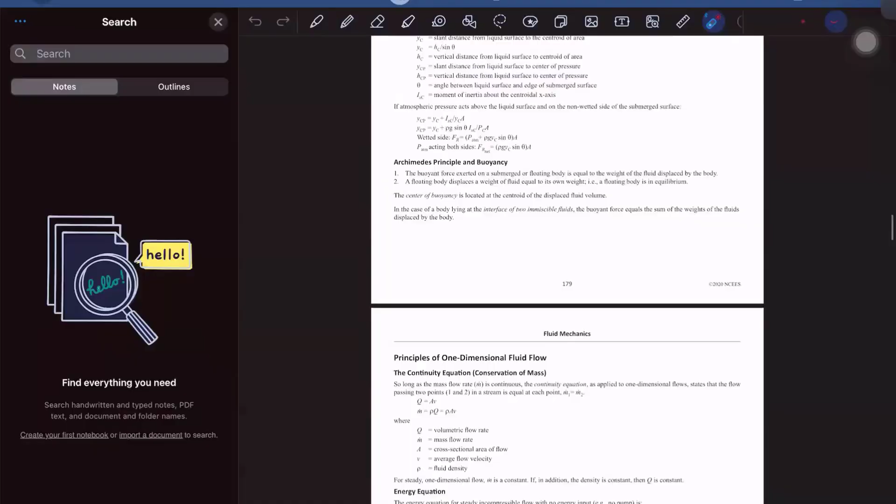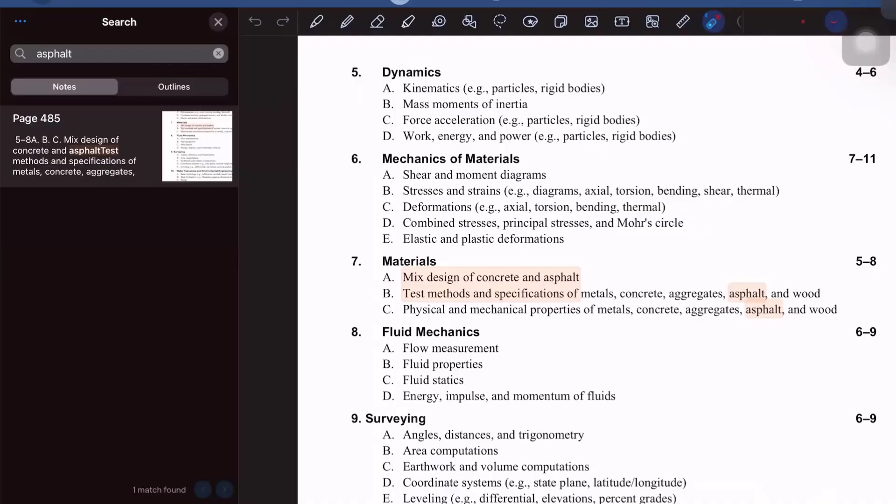What are the things that are in the syllabus but not in the handbook—especially if I type asphalt, it is mentioned in the civil engineering syllabus but there's no content given in the handbook. So we collected it anyway, because we don't want to take the risk, and you guys should not lose even one mark.

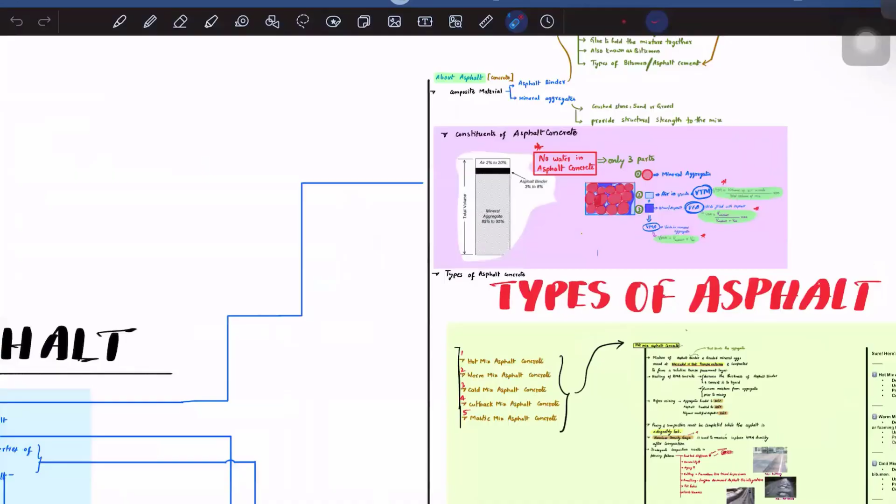We put in a lot of effort and constructed precise details about asphalt: what is asphalt, what are its specifications, test methods, physical and mechanical properties, and practice questions on asphalt. I made it like a flow chart so it will be easy for you to follow.

Asphalt is a composite material made of asphalt binder. Asphalt binder is like a viscous petroleum byproduct—it acts as a glue to hold the mixture together. It is also known as bitumen. And again, there are different types of bitumens or asphalts, which I have given data on.

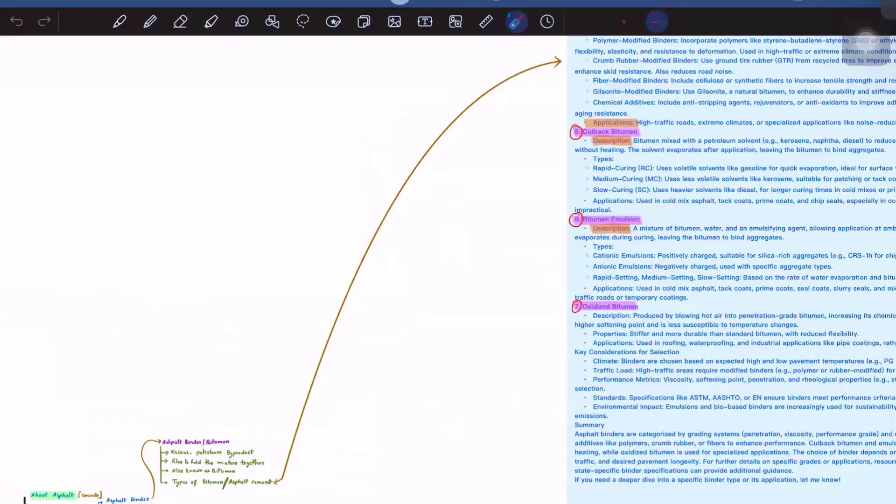Since asphalt is not in the handbook, it's a game of your memory. So I have highlighted things and given plenty of data to be on the safe side—you guys cannot say I did not teach you. But it's not done with just that.

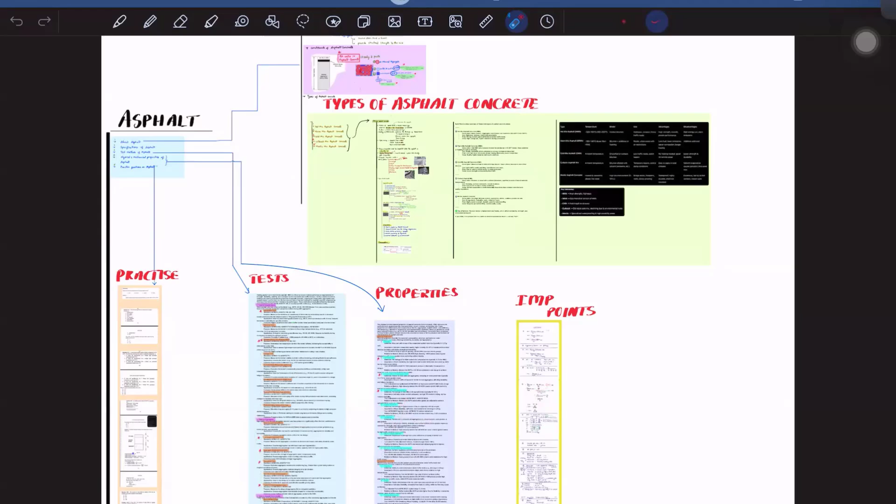I have to help you identify which topics are important so you can cut short this content. For that, I highlighted the things you can just remember, leaving aside all the lengthy technical explanations that are not needed. I also collected some practice questions so you can see what kind of questions you can get regarding asphalt.

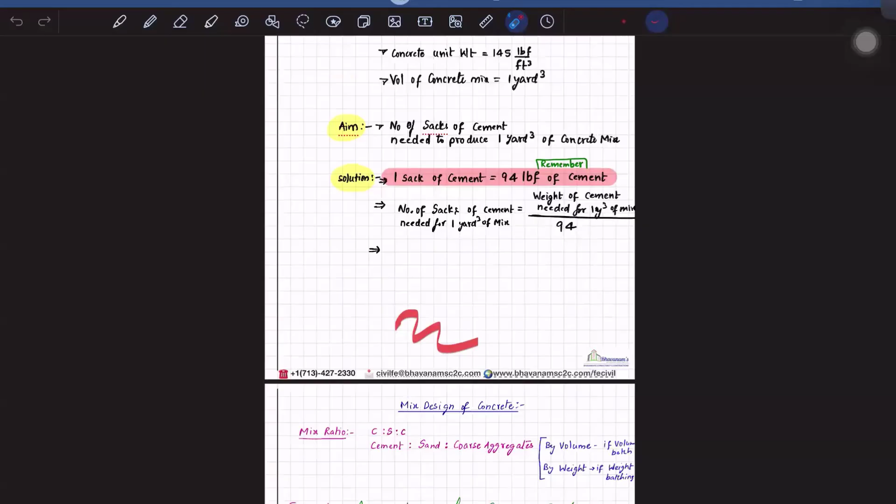Even for contents like the mix design of concrete—they mention concrete in the syllabus, but if you go to the handbook, you'll not get any content. They have talked about reinforced concrete much, but not basic concrete and how we design it. So for that too, we collected all the resources, previous papers, etc., and framed examples here.